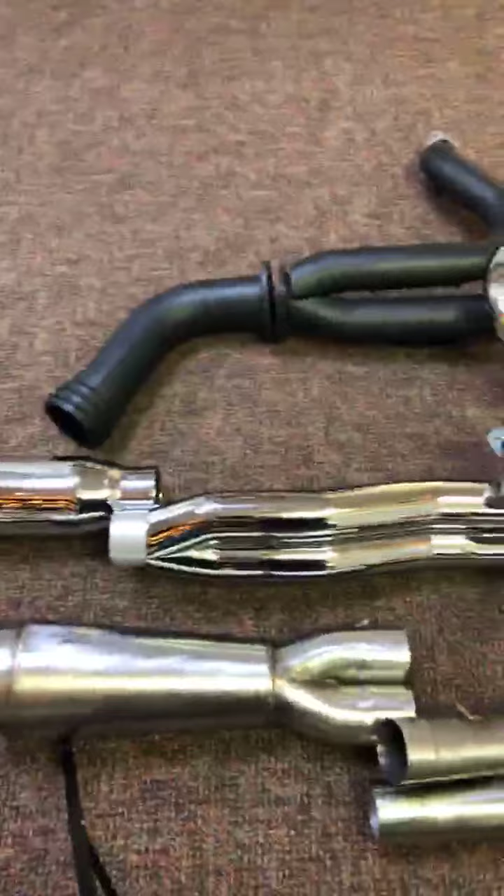Whereas the chrome 2-in-1 is the D&D Boarzilla, which is my favorite because it has the combination of the big pipes. It starts at 1 7/8 and it steps twice, and it has a really nice collector. If you'll look, it's about—well, please forgive me for flopping around—it looks like it's almost a foot longer, maybe 10 to 12 inches longer from where the collector starts to the end of the collector. So this gives us a whole bunch wider power band, and then it has a muffler you can see through. It's an open core, and it's really long. So the total pipe length is the longest we use.

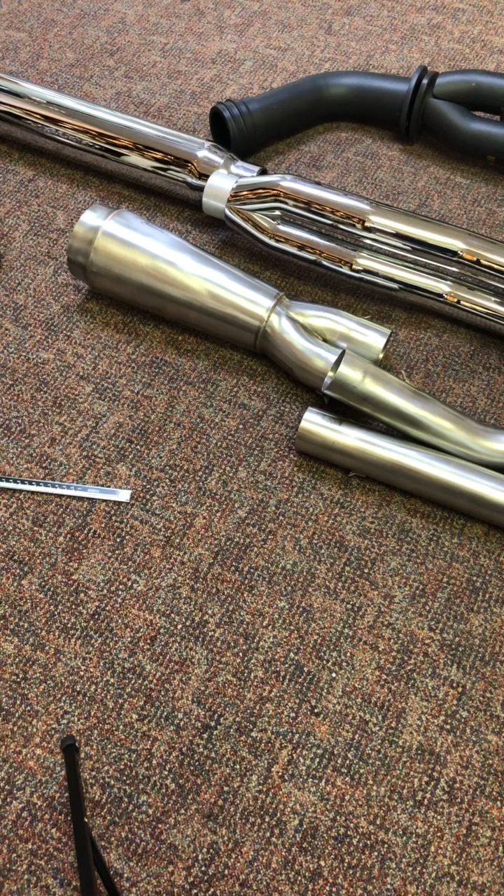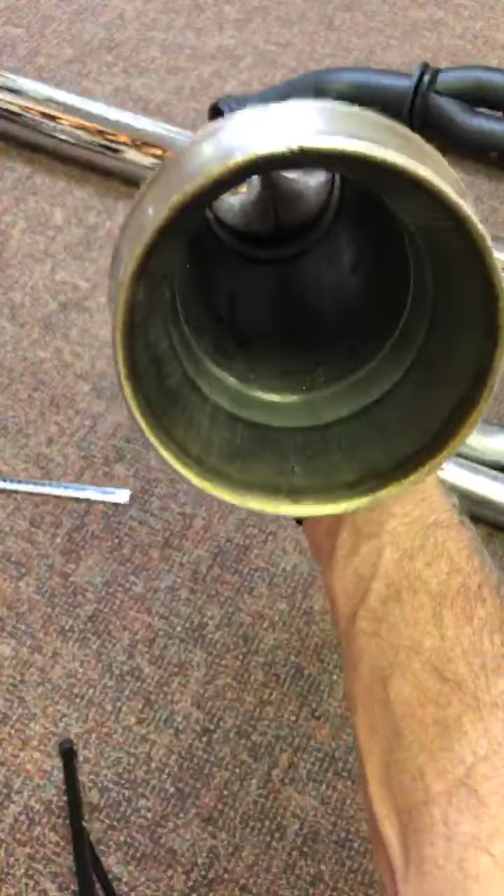And what we found with the Harleys is they like long, big pipes. Now this next one, the lower pipe, is a really big Burns that we had custom made for us. It's one size bigger pipes than they normally make. So it's a 2-in-1, and it has a really, really big muffler collector. Super high quality, done really nice, finished nice, and it has a big muffler core. It's loud, but it's better than straight open pipes like I had on Bagzilla.

Now, this also has a narrow power band, because it's really big and really short. And the important thing about the differences here that I want to share with you guys on the engines—this is going to be an important statement that I think is important—is this: once the exhaust system is full, no more intake will go into the engine.

Now, if you spray it with nitrous or put a supercharger or a turbo on, once the exhaust system's full, we continue to overstuff it. And when we overstuff the engine with more nitrous, more boost, supercharger, turbo, or whatever the power adder is, we put more than the engine can put in by itself. That's a power adder. Well, let me tell you about the exhaust system on power adders: the pressure in the exhaust system goes straight up.

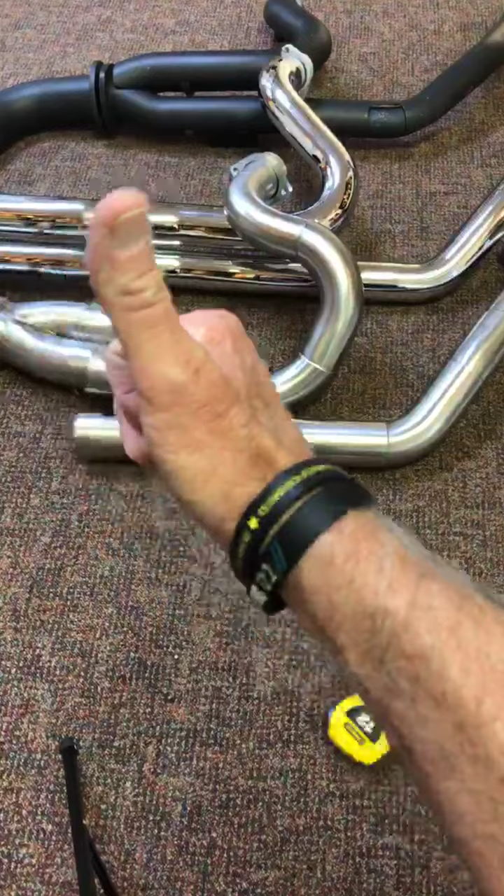So when you run a normally aspirated engine and you develop the perfect exhaust system for it to where you can make the most horsepower per cubic inch, and then you spray it with nitrous, either the exhaust system was too big already, too little already, or just right. That's just the fact. So when it was exactly the right size to make the power curve you wanted, and then you put a 50 shot or a 60 shot of nitrous on it, if you had a pressure gauge in the exhaust pipe, it would show the exhaust pressure go way up because the pipe isn't big enough.

No more power will go through the engine once the exhaust system fills up, unless you stuff it with boost or nitrous, turbo or supercharger. When you stuff more air in, the pressure goes up in the exhaust.

Now, I hear people talking about how you need back pressure. I don't need back pressure. I need that stuff to get out. I like it to get out fast, and I like for it to get out on time. So cam timing is really, really important.

When you say back pressure, what you've really got going on is something I don't know much about, but I believe it's sound waves. The reflection wave goes to the end of the pipe, turns around, and comes back. You want that tuned correctly—that's why the length and the sizes are so important. But I don't know an engine that needs back pressure.

You've got some side dump pipes that work good on your bike. You've got some 2-in-1s made by other companies—brand X, brand V, brand Z, brand B, and all those other brands. They work on your bike and you're happy with them. That's great. But these are not the best pipes in the world, okay?

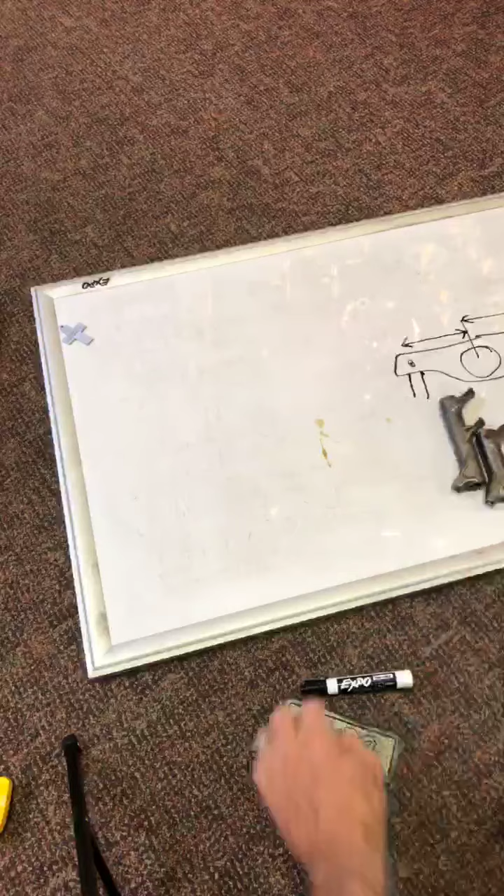Now, back in the day when we raced 4-cylinders, they had independent runners, and we had—look at the oil that came out of that rocker arm. Can you see the screen?

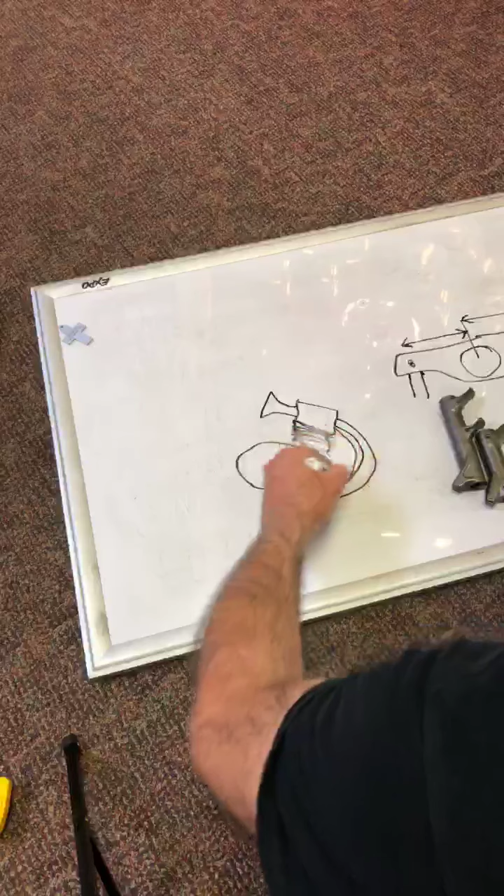Yep. So we had our 4-cylinder engine—that's the cylinder, the crankcase, and the transmission—and we had big carburetors on it, okay, and then we had the header with 4 pipes going into it, and we had this collector, 4-in-1, and then a megaphone. So everybody got my picture? Okay.

When we had the exhaust, we'd run this engine, say 10,000, 11,000, 12,000, 13,000, 14,000 RPM. When this exhaust system would fill up, it would back up in here, and then back up through the head, and then come right out of the carburetors. It made a fog back here that you couldn't see going down the racetrack, but on the dyno you could see it.

That's called standoff. What I saw was when it went to peak torque—when that engine made the most torque at whatever RPM—once you went past that RPM, it started backing up and coming out. So what we learned was, once the exhaust system fills up, no more will go in.

Yes, we continue to rev it up. Yes, we turn more RPM. And yes, it goes rich, you guys, especially with these carburetors. These were carburetors, not fuel injection, okay? So this air would go in and pull fuel. This air would go back out and pull fuel. This air would go in, it would pull fuel. So we had so much fuel going on here, our air-fuel ratio going down the track...

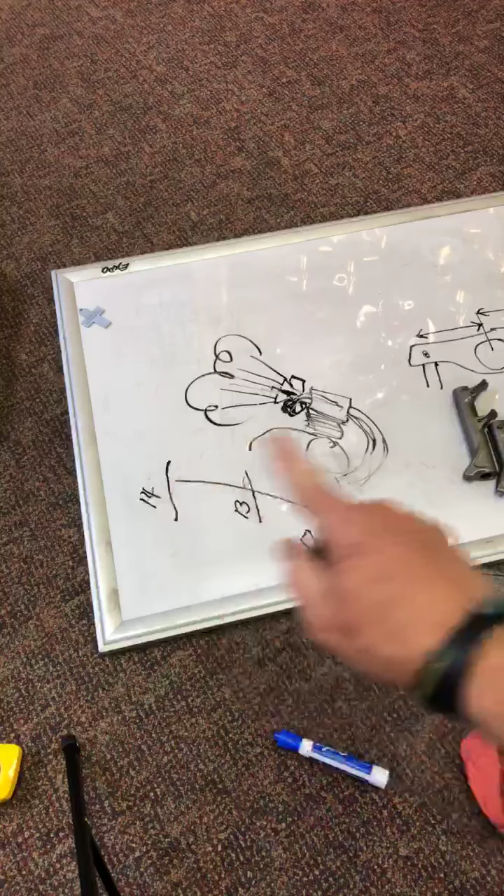The higher we revved it, the air-fuel ratio would change like this. At low RPM it would be, say, 14-to-1, halfway through the gear it'd be 13-to-1, and by the time you shift it'd be 12-to-1. It was adding so much fuel. The higher you revved it, the more it started carbureting twice—air and fuel, the air going through the carburetor both ways, blowing in, blowing out, blowing in, blowing out. That didn't happen—there was no standoff here until the exhaust system filled up.

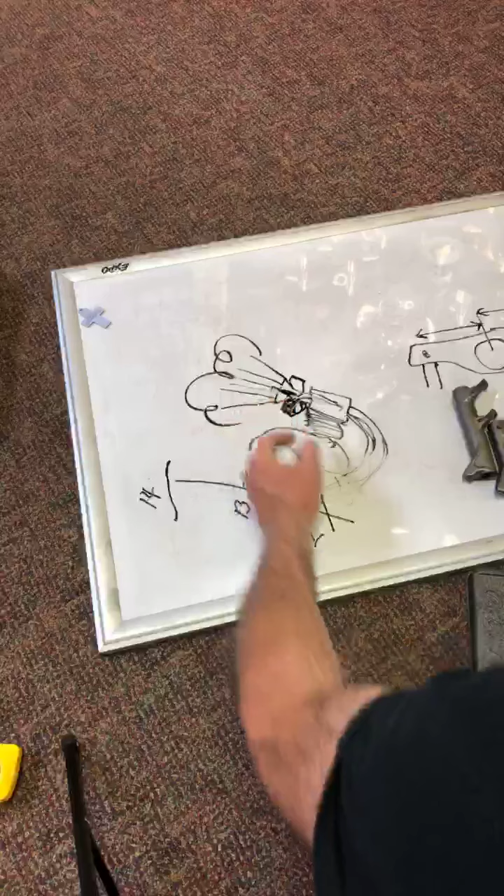That's something that even my old car buddies don't really get to see, running independent runners. They didn't get to see standoff very much because most car guys use a plenum with carburetors, and the plenum would absorb the standoff. It would be full in there, a hurricane of air and fuel, and each cylinder would pull on the plenum. As RPM went up on the pro stock and competition eliminator engines, the air-fuel mixture got richer and richer because of standoff in the tunnel ram or plenum, and the engine would suffer for it.

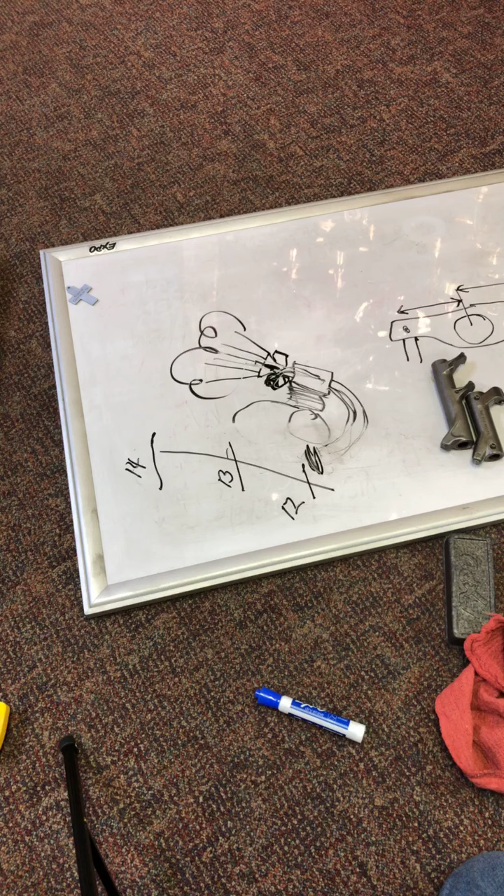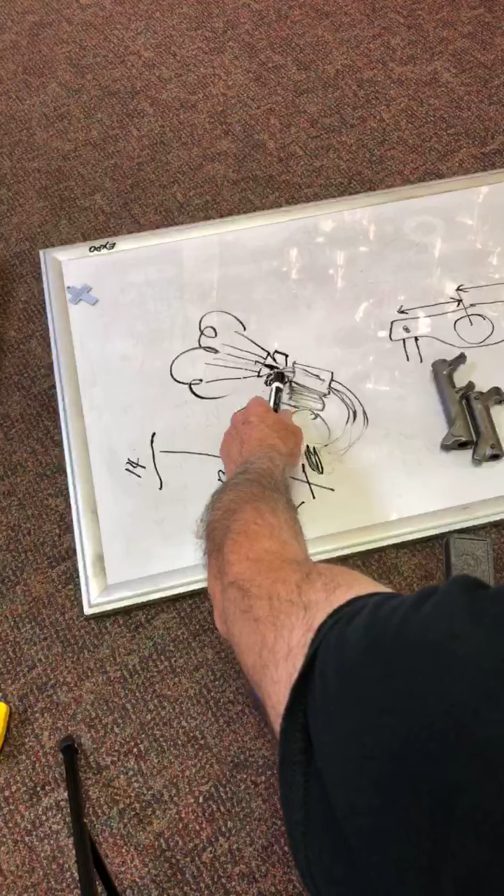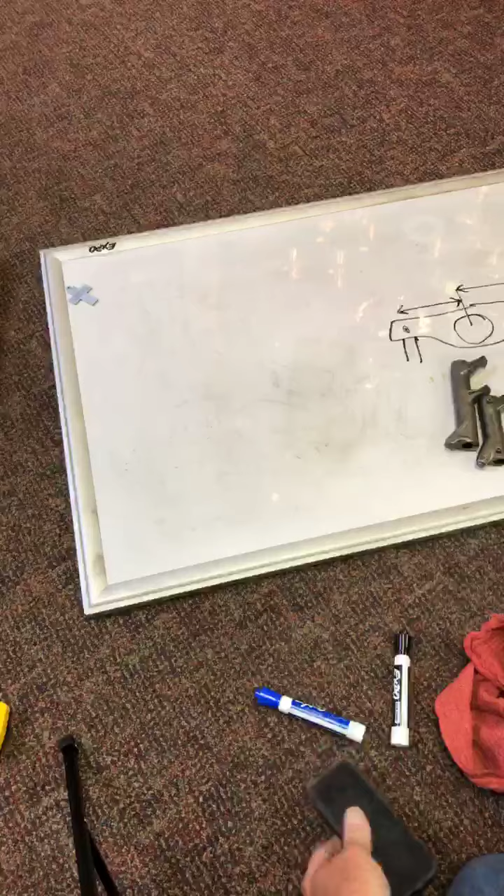So EFI came out, woo! And when EFI came out, we didn't really go faster or make more power, but we could make more power in more places. What was really cool was down low, where a carburetor was slow and the fuel wouldn't come out, causing bogging RPM. So we'd put accelerator pumps, power jets, and extra jets, trying to get it to carburate well at different RPMs. Now with EFI, we can just spray the injector when we want it to come on, less or more, depending on RPM and throttle position.

Get a swig of water.

I'll stop for a minute and tell y'all this is my opinion, because there are a lot of great exhaust systems, great engine builders, and tuners out there. A lot of people know what they're doing - that's what they do for a living, and they make a good living making motorcycles and engines go fast. So I'm not competing for or against that. This is my tech talk, where I've been given the opportunity to take a gift the good Lord gave me, gather this knowledge and experience, and try to turn it into words I think I'm right about. I wouldn't bet your life on all of it being true, but this is my experience and I'm sharing it. If you watch this often, you'll learn I'm sharing what I think I know.

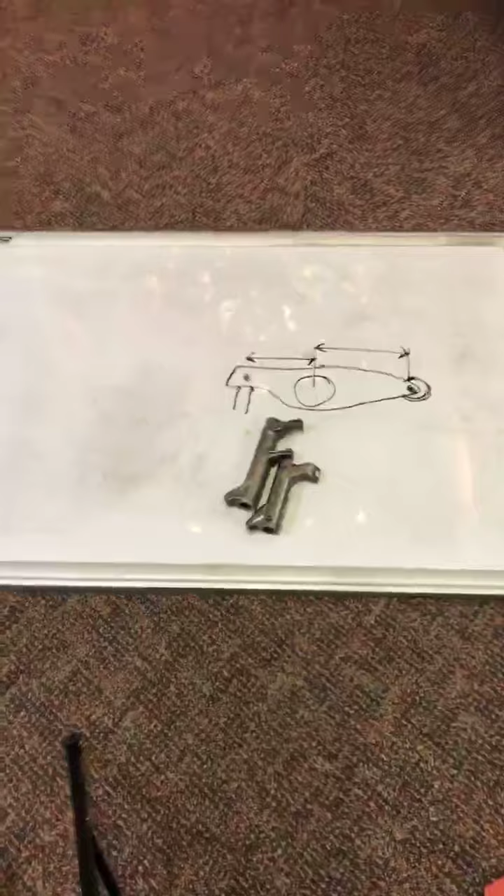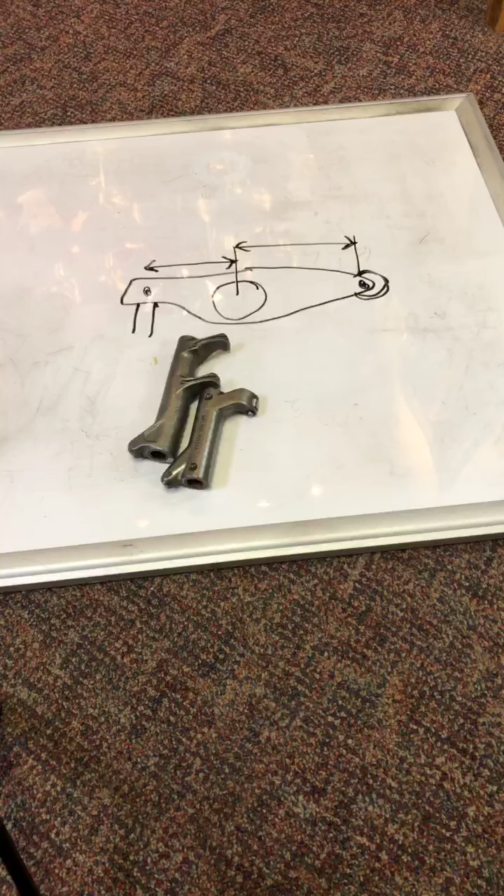Now I'm going to spend a minute on this rocker arm ratio before we run out of time. There are two rocker arms - let me drop this stand down so we can get a better view. A lot of guys have M8s and twin cams and know what these look like, but some people don't. This is the standard twin cam rocker arm - what a horrible looking thing. S&S makes this as a better version of the stock one, with a roller tip.

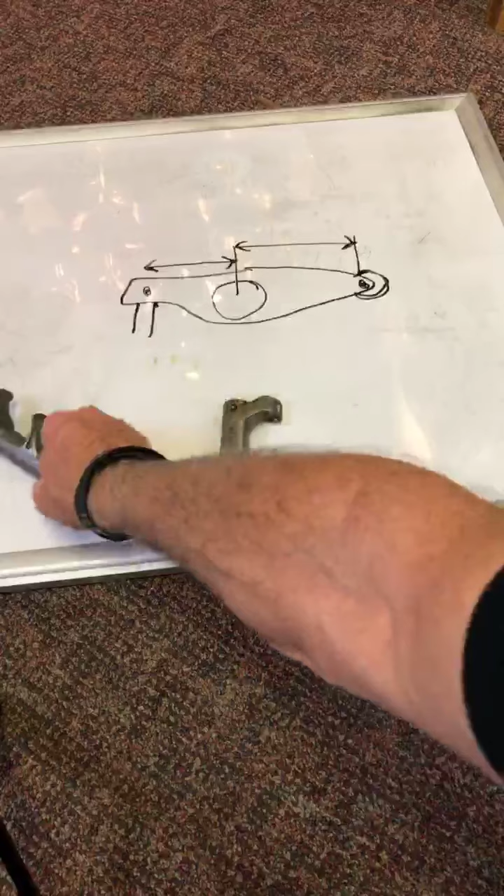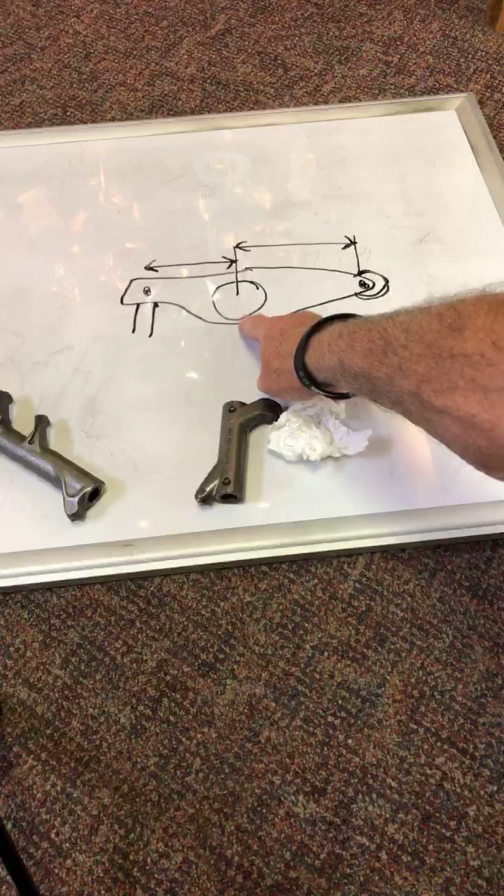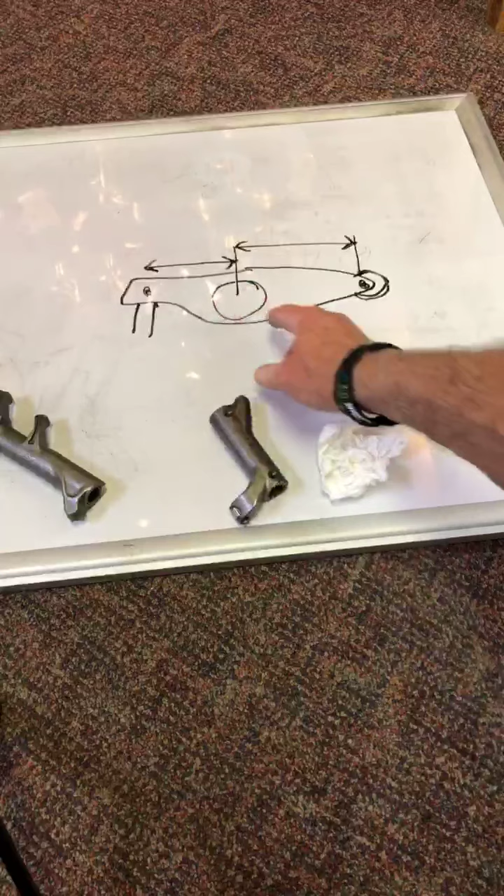This is a 1.62 to 1 rocker ratio, and I wanted to explain what that means. A 1.62 to 1 rocker ratio means that from the fulcrum point, whatever the distance is from the fulcrum to where it actuates the valve, divided by push rod to fulcrum. If this is, let's say, 1.5 inches and this is 1 inch, that would be a 1.5 to 1 rocker ratio. A lot of Chevrolets, Fords, Chryslers, and stuff, they all come with 1.5s, 1.6s, 1.7s, 1.8s.

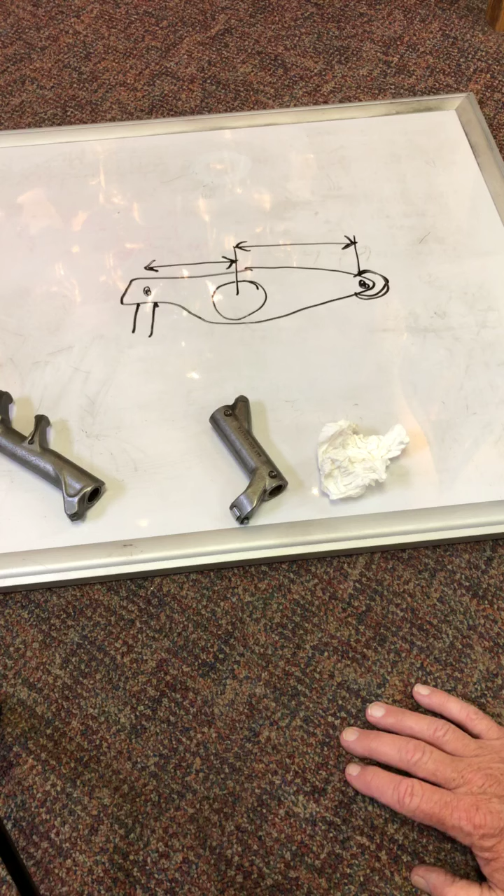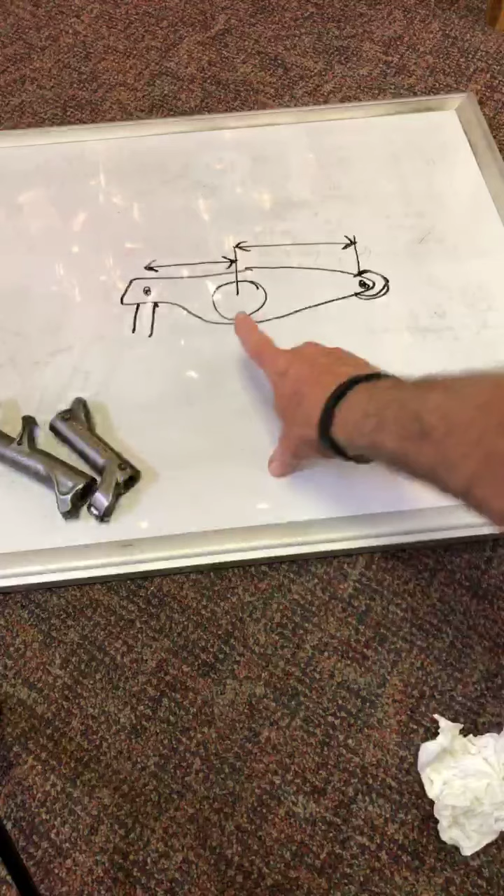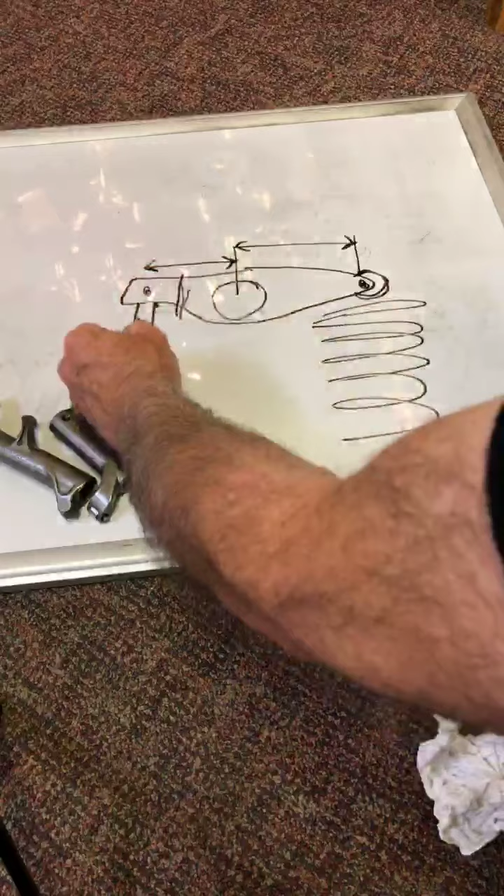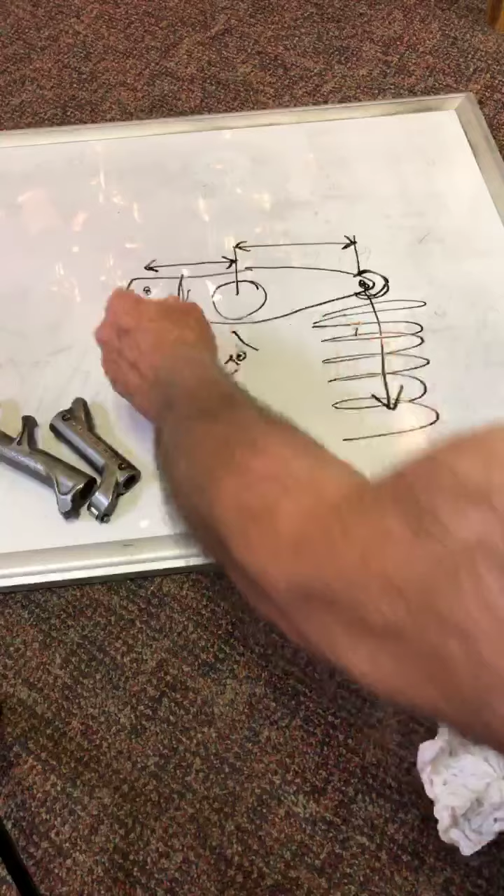You've even heard of 2 to 1. So let me tell you about a 2 to 1 rocker, like we use in the Pro Stock engines. It would have a fulcrum of, say, an inch here, and 2 inches here. Boy, talking about putting some pressure on something. If you're going to lift a big old spring 1 inch here, and do it with a push rod over here with a 2 to 1 ratio, this little part is working hard, this push rod's working hard, and this adds however much pressure this spring is. If it's a 2 to 1 rocker ratio, and this is 1,000 pounds open, this is 2,000 pounds of pressure over here on the push rod.

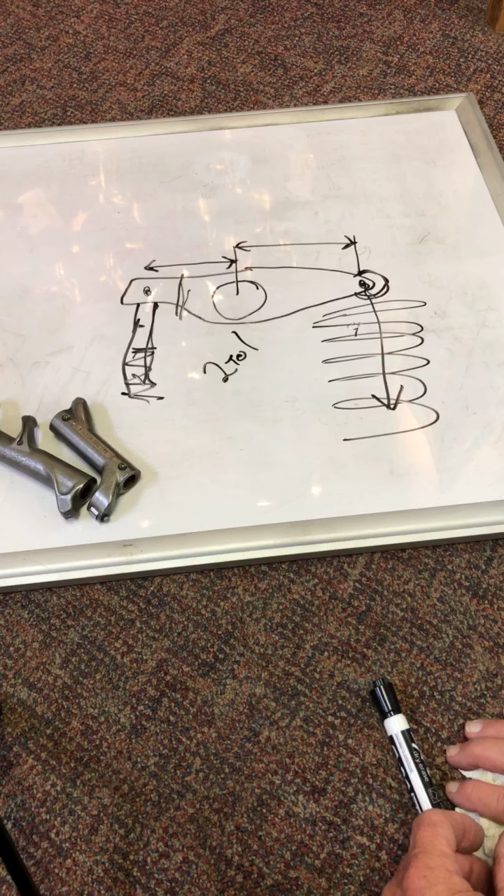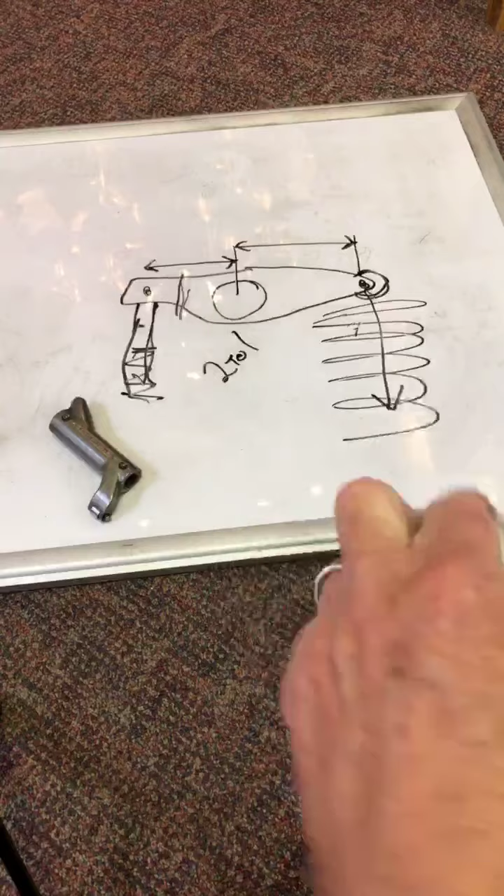That's why we don't like spindly, thin wall, lightweight push rods, because they bend and react, like javelins, like a spring. My buddy Joe Hornick was explaining to me one time about the rocker arm, and the push rod was like a spring -- it would bend and react.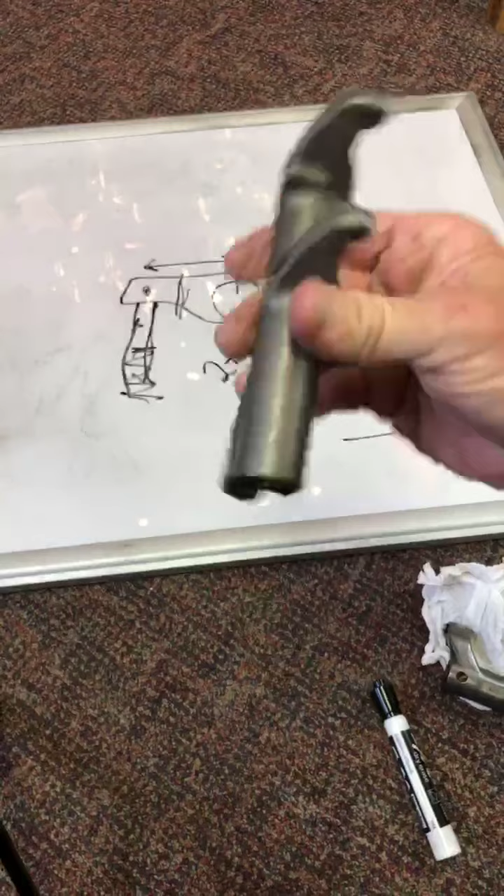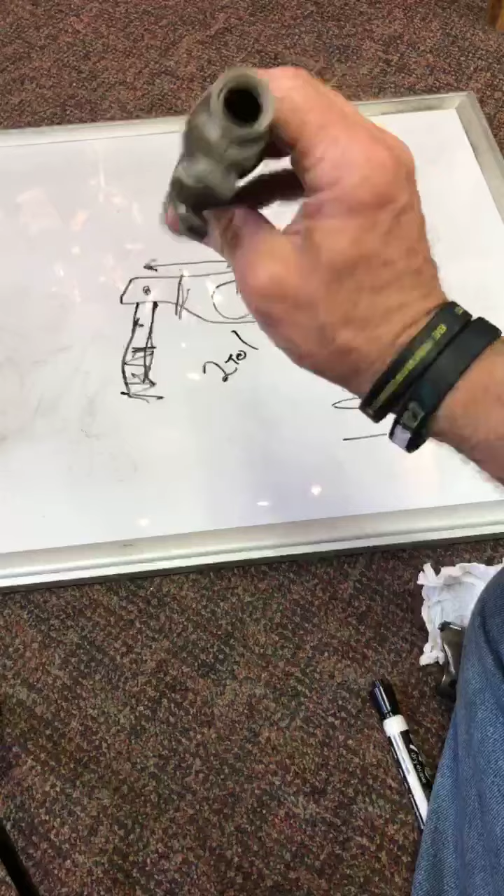It is kind of spindly. It has some finite element analysis into it. This one arm here is kind of slim and trim, and this one's a little bit fatter and thicker, more cross section. And I think of this as a torsion bar, because at some RPM and speed, this unit's going to twist. So when people are so particular about getting the valve lengths right, the install height right, and all the clearances and lash right -- what happens when this thing starts winding up and unwinding, winding up and unwinding? And don't think it doesn't. This unit here would wind up and unwind just like a torsion bar. This rocker arm right here is a torsion bar. This thing here will wind up and unwind.

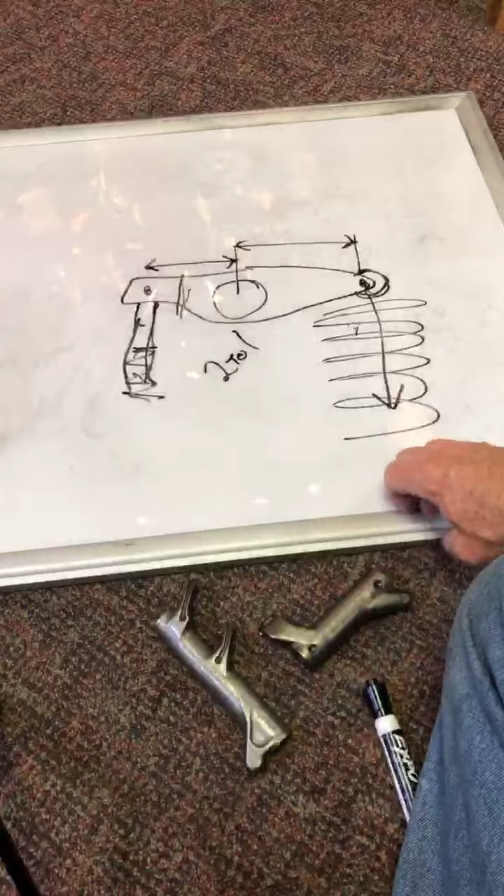Now, as a special treat, let's talk about some of the things we learned going back to the exhaust. I'm kind of skipping around here, but that's all right -- I didn't make a plan, I'm just going to talk.

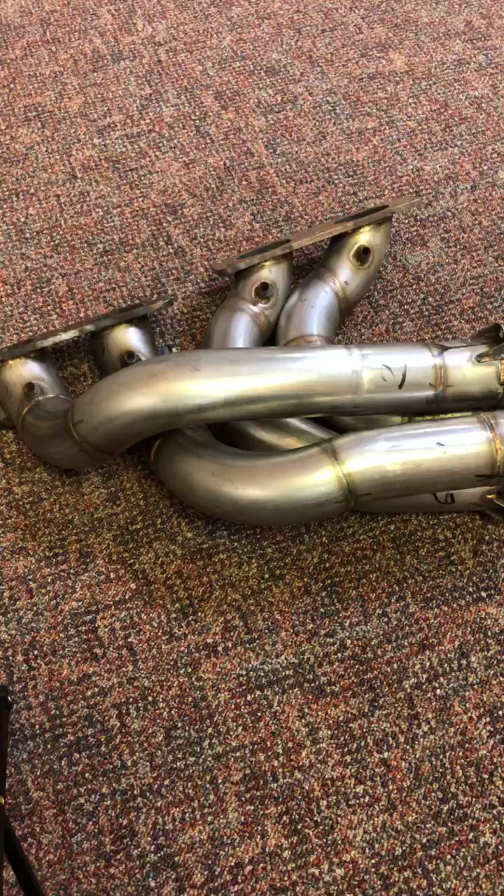Here is a 4-in-1 pipe off a Pro Stock car. The Pro Stock car is 500 cubic inches. That makes it -- I think it's got 4 124 engines in it, like the S&S 124, there's 4 of them in there. I think it's 124, 124, 248, 372... yeah, 496. So the bore and stroke is big bore, short stroke. And this pipe is big too. This is a 10,000, 11,000 RPM 124. Here's one 124.

And when the engine's a V8 like that, it runs like a V-twin, right? So you get a pipe from the left bank of the engine and a pipe from the right bank of the engine. And the sizes and lengths are so important. These guys want a really narrow power band. They want to run their engine from 9,500 to 10,500, or 10,000, 11,000 RPMs, whatever the rev limiter is now. I can't remember, but back in the day, before they came out with the rev limiter rule and fuel injection, they were turning them almost 12,000, over 12,000 RPM.

But they have a very narrow power band, so these short pipes suit that, but they're also really big. These are big pipes for a 124. Most motorcycles, Harley guys, don't run pipes that big -- they don't run that much RPM either. But when the exhaust system's full, no more air will go in, is an opinion of mine. So I think that's really important.

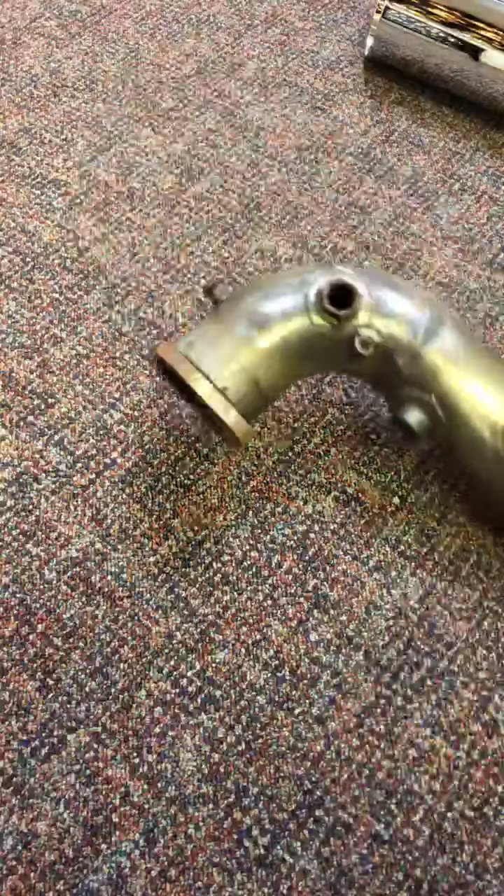Now I'm going to move that out of the way, and slide over here to the S&S 160 exhaust pipe. Here's an exhaust pipe off of an S&S 160 Pro Stock engine. You can't hardly tell it on my phone camera, but this is 2 3/4 inches.

Right here, 2 3/4 inches, and then it steps up, and out here at the end it's 3 inches in diameter. All right, this pipe right here is for a 180 cubic inch engine—actually a 160 cubic inch Pro Stock V-twin, and this is for one cylinder, okay?

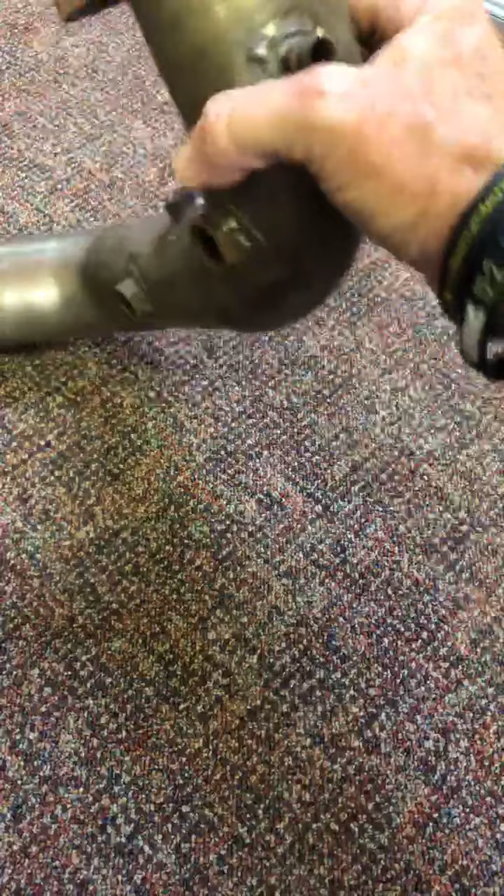Now if it was a V8, what would that be? 160, 320, 640—that'd be a 640 V8 with a 5 1/8 bore and a 3.8 stroke, turning 10.5, 11,000 RPM. It would have a 2.7 or 2.8 intake valve and a 2.1 exhaust valve, and it would use a 3-inch exhaust pipe, or at the head a 2 3/4 exhaust pipe per cylinder, to have a 10,000 RPM 640.

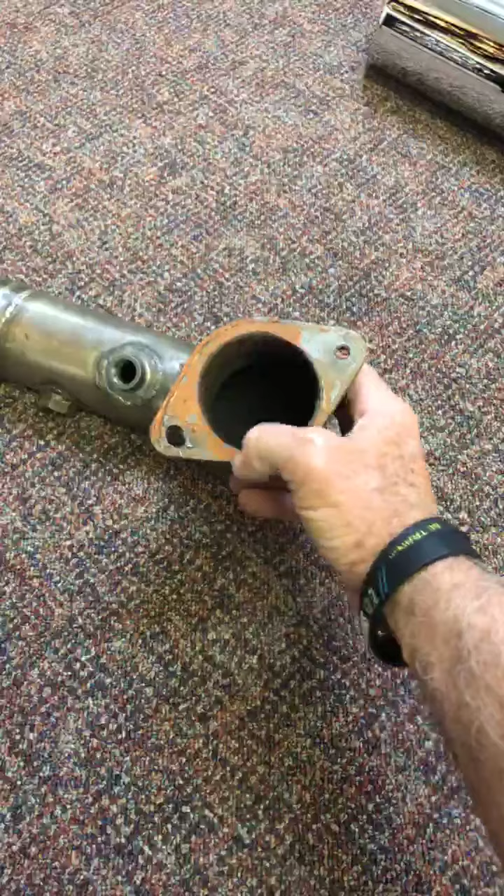So given those ideas, this is what's really amazing about this pipe and that engine. We ground this smooth and put silicone on it, and it was a straight pipe, y'all. I had it held on with some springs,

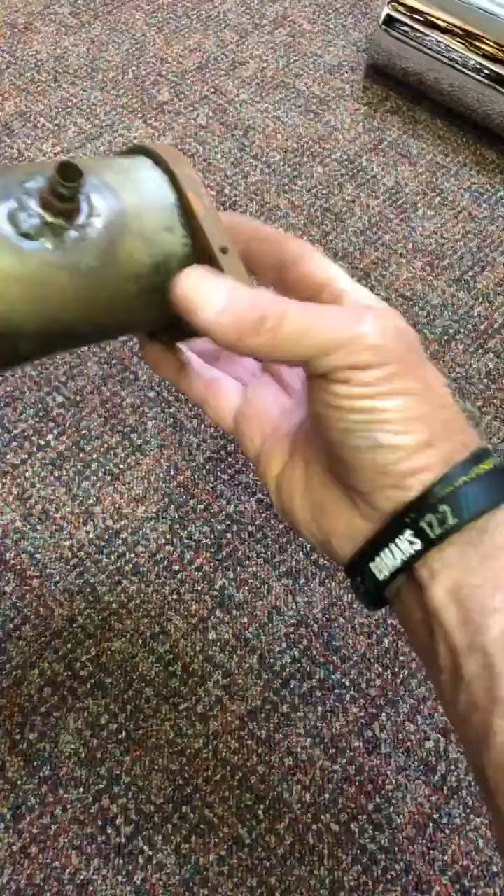and this slips onto this spigot. When you'd be running this on the dyno at 10,000 RPM, you could see the springs stretching and the pipe trying to come off the flange. And also, it would leak here. I mean, how would it have enough pressure in this 3-inch pipe?

A 3-inch pipe—it would blow the pipe off of the flange, the springs would stretch, and it would leak around here. There's some serious pressure going on in here. I just thought that was interesting and worth sharing.

But there's a lot of cool stuff going on in the way the exhaust works with it. And our opinions have changed over the years, because back in the day we were working on overlap—what Ed Iskenderian called the 5th cycle, the overlap cycle. Back in the day, on Pro Stock cars, we ran 80 degrees overlap, where the intake valve and exhaust valve were open at the same time, a full 80 degrees. That's a long time. And nowadays, with our really high-end race engines, we're running a lot less overlap.

Some of our really fast Harleys are only running 40 or 50 degrees overlap. Some Pro Stock cars are running 50 degrees overlap. That's a big difference. So we found out that may have been a cycle that was interesting back in 1955 or '65, called the overlap stroke. But now, turning 4,000, 5,000 RPM—back in the day that might have been something you'd tune for. Tune the overlap, and they called it scavenge in the exhaust. One cylinder would scavenge another one.

But these really fast V-twins that have straight pipes on them, there's not much scavenging going on, because it's one pipe, 3 inches in diameter, blowing in the air. At the pressure, you would not believe it, you guys. Listen, I told you it was so much pressure it would leak out between the head and the flange. I mean, if you're standing behind the motorcycle when they take off, it would literally blow your hat off. The pressure coming out of the exhaust pipe is unbelievable.